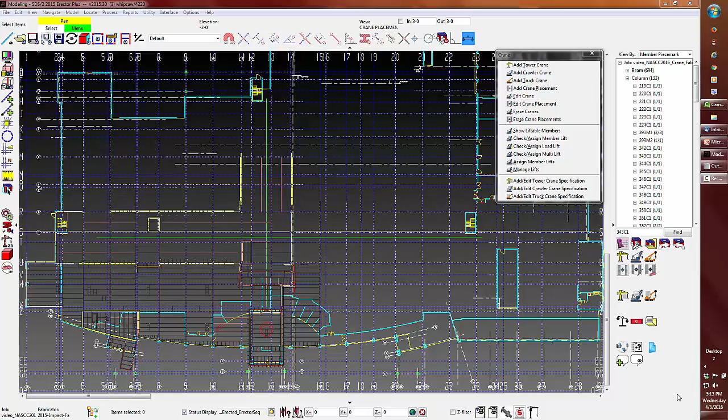I'm determined to keep the crane size down by reducing the reach. So I'll add the crane inside the structure, box out a few members, and then move the crane out to erect the remaining members. One of my goals is to reduce the amount of placements required by finding the best location for as many lifts as possible.

I'm going to add in the widely used Manitowoc 2250 and evaluate its placement at grid 17 in U. I named the crane, and I'll pick the boom, a 140-foot boom. Let's put in a jib 132 at 40 foot, 5 degrees. I'm going to set my main to 4 parts of line and my whip is going to be 1.

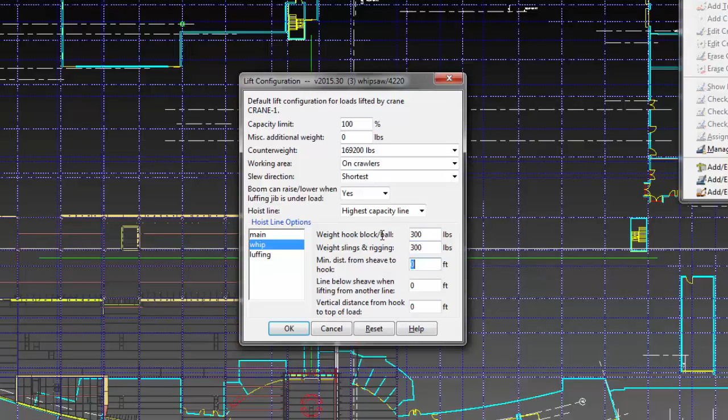Now when I burrow down into my lift configuration, let's set my counterweight at 169,200 pounds. For the main line, we're going to give a 4,000 pound block, 300 pounds for the rigging, 15 for each of the remaining. For the headache ball, we're going to throw in 300, another 300 for the slings, and 15 for those remaining values. I'd like to point out that this can be modified on each lift configuration, right down to each placement, right down to each lift.

I'm giving the first placement for this crane a lift. Here I'm showing you how you can modify that configuration.

The system is checking on the fly the feasibility of the set location of the lifts based off the following calculations: strength and stability of the crane, hoist capacity, so that's the parts of line, the reach radius, which is taken from the members or assemblies' center of mass or gravity, and lift height.

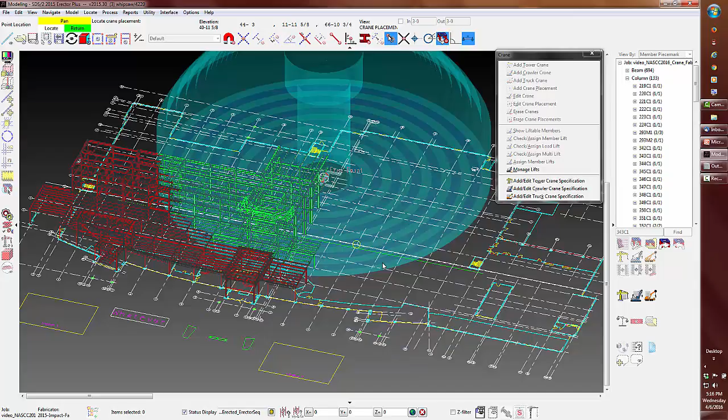When I rotate, you can see these blue rings, which indicate no lift area for both the boom and the jib. Green indicates that the pick and set points pass. Orange is a critical lift as per OSHA subpart R, which is 75% of the rated load chart. Red means either the pick or set calculation has failed.

Note, you can still add the failed lift to the crane's lift list if you disagree with the system. As I undo back to plan view, I'll finish by locating at axis 17U.

Next, I'll orient the direction of the tracks. Now I will set the furthest laydown location or pick point for the crane. Note that this laydown can be modified for each lift. The same criteria used for the set point is also used for the laydown point.

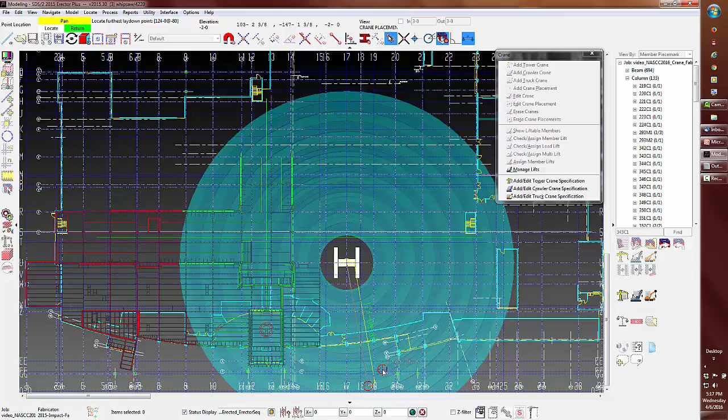To get the results I'm looking for, I'll set the point at 124 foot at 80 degrees outside of the structure. Then I'll finish by setting the boom orientation.

On a side note, the data is correct, but the crane object you see is only a placeholder and does not depict the actual size of the crane dimensions except for the boom and jib length.

By using the Show Liftable Members, I can see the liftable members at the selected placement and their lift conditions using the current crane configuration.

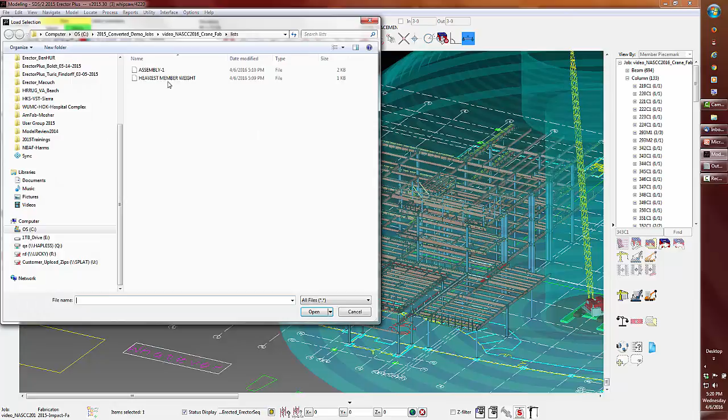I'm going to check the 343 C1 column, which was determined as our heaviest weight using this placement location. Again, I can modify the lift configuration, but I won't. We can see that the lift passes for the pick and set points.

SDS2 uses the deductive method for its lift calculation. Some may use the additive method and some a combination of both. The difference between these methods will cause the difference in where the 75% for the critical lift is at. We also do not use interpolation of the rated load charts, as stipulated from our research.

Finally, our sheave height is measured from the sheave to the underside of tracks. We do not take into consideration the 3% deflection on the boom and jib during the lift. Also concerning height, our check is done at the set and pick points. We do not look for obstructions along the way, nor do we consider the length of the rope between multi-lifts. The height is determined from the top of the lifted steel.

I will assign this lift to the placement.

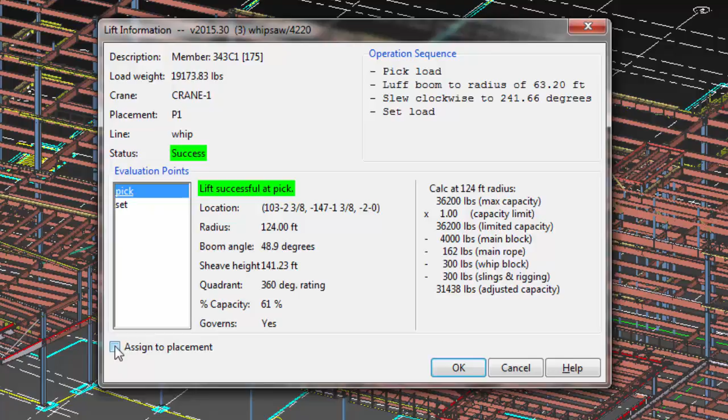I'm going to open up the Manage list for this crane placement. When I select a piece mark in the list, notice that the column is selected in the model. The same works vice versa. I can view the assigned member and of course all of its calculation data.

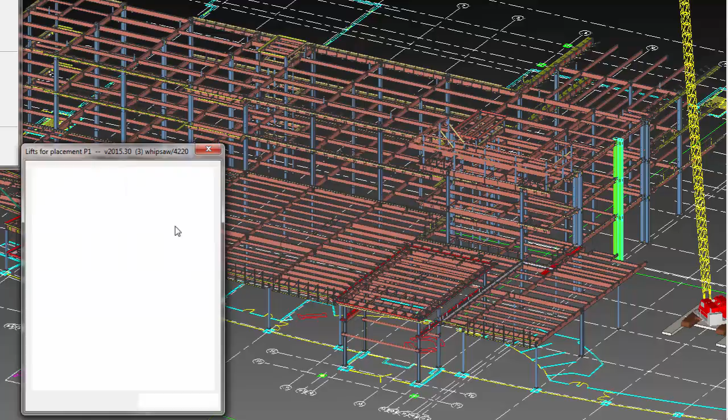I can also edit this member again, and modify the pick location or the lift configuration. I'm going to change this to a main line, from the whip, and we now have a critical lift. Since the pick governs, you can modify the pick location so the lift is not critical.

I want to point out that you can assign failed lifts to a crane placement if you feel the lift can be made. After all, you're the boss. All this data can then be reported, but we'll see that later.

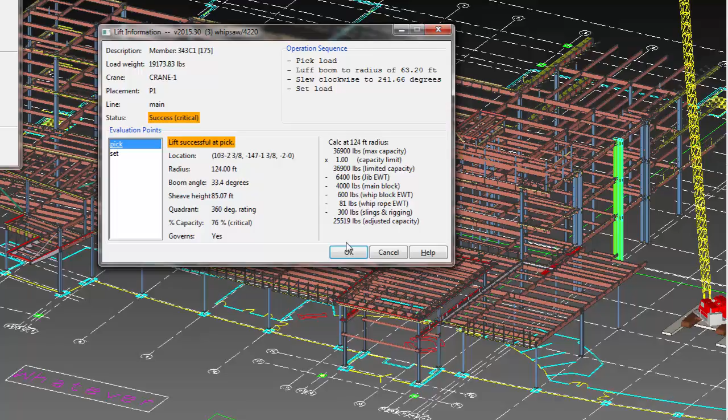It would take forever to select each member and add it to this crane placement, so I will use the Assign Member Lifts to batch assign members to this particular placement. Using this tool, I can disable the ability to select members that are hidden or members that are failed or assigned to another crane placement. Once again, you have that lift configuration to refine this lift.

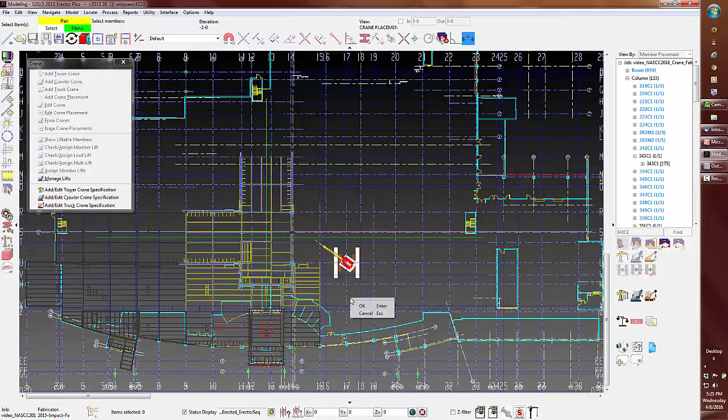I'm going to grab a portion of the building and then assign the members to this crane placement. I can see all the members listed with this placement, and when I select the members in the list, I see the members selected in the model.

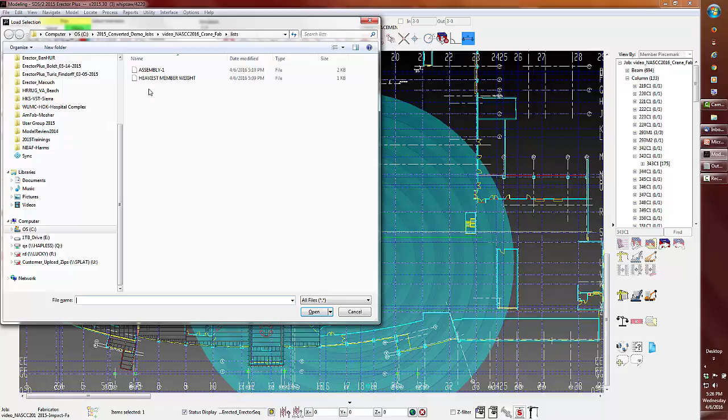Time to go ahead and add that assembled canopy to this particular crane placement lift. There's all the data for the assembly and all the members that are assembled together. When I go to my Manage Lift list, we can now see that assembly.

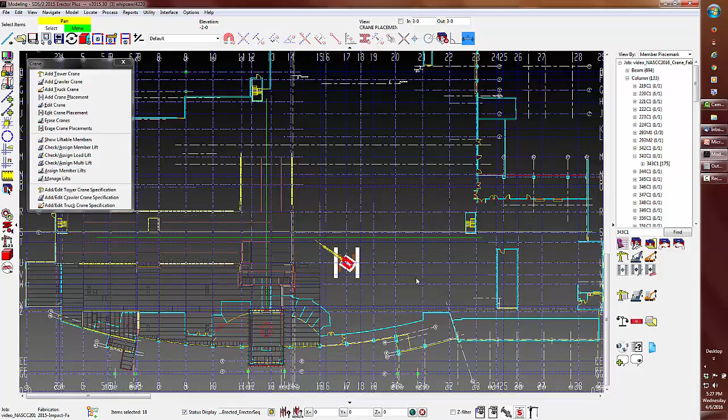What about all the other non-steel lifts, such as decking, panelized joists, concrete panels, and so on? This is where the Assign Load lift comes into play. I can assign items like decking. I'm going to go in here and add a 3,000 pound bundle. I can modify the pick point, but I'll leave what I have and leave the configuration as it is.

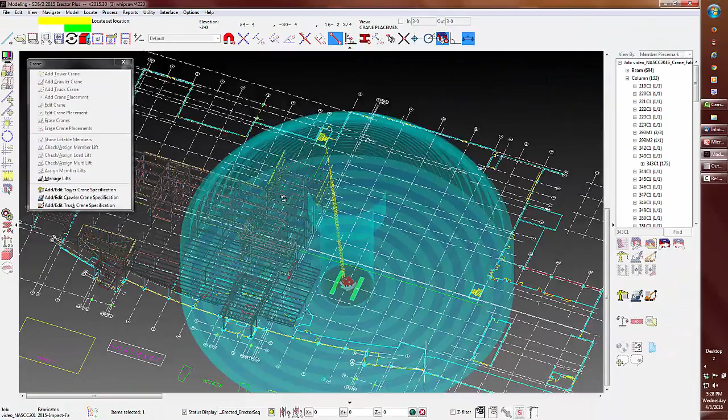Then I will go ahead and set the bundle on the roof. There's the information for the lift. Go ahead and assign it to that crane placement. Look at Manage Lifts, and we now see the decking in that particular lift list.

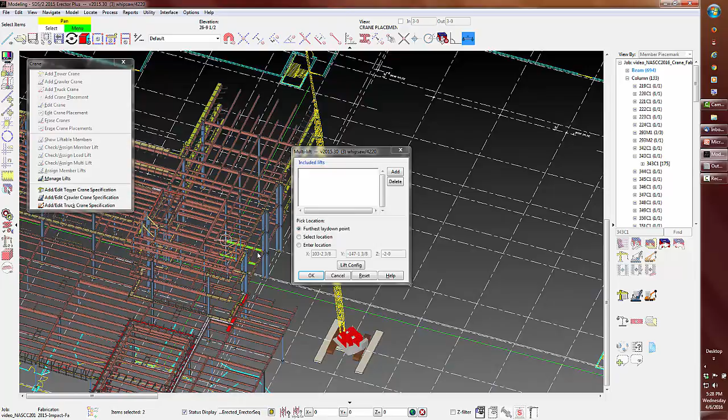We can even do multi-lifts or Christmas treeing. Please note that the height will need to be evaluated with this, as mentioned earlier. Select the members we want, go ahead and assign it. We can see the calculations for the pick and set point, and the members that are in that particular lift.

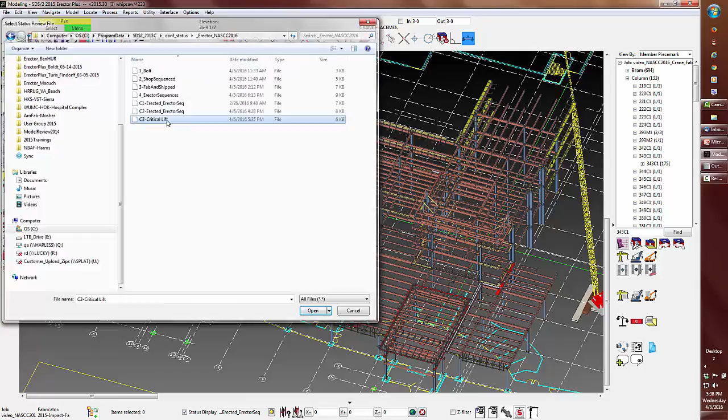I would add in another crane placement for this crane, but I think you get the gist of it. In short, each crane can have as many placements as required, and you can have multiple cranes and multiple crane types with multiple placements. You even have status filters that can show members with critical lifts, which can then be exported in a color-coded 3D PDF as seen in the earlier work package video. The maroon members are assigned to the placement and the orange member is the critical lift.

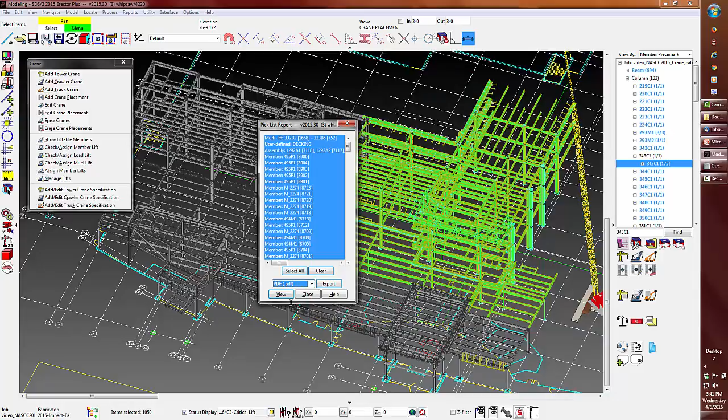Now to run a quick placement pick list report for this crane. This is just a pick list for this placement. It is not an ordered pick list. At least it's not an ordered pick list at the moment.

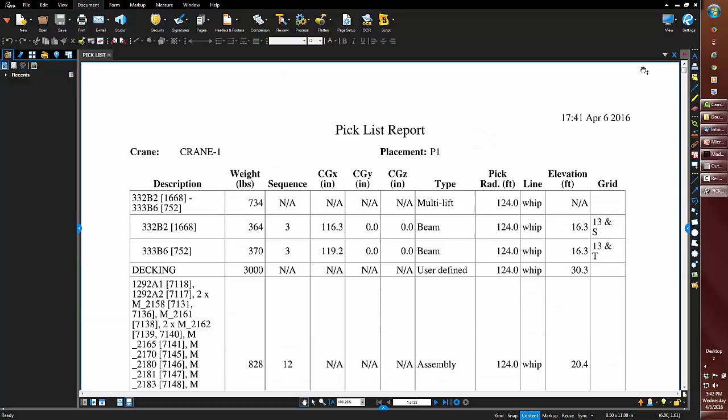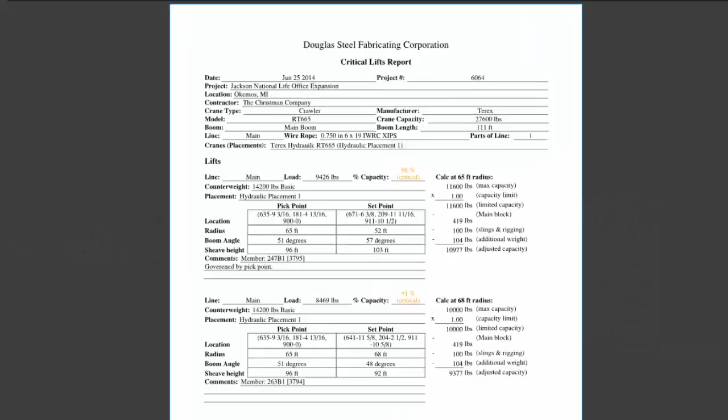Here are some examples of exported data from Douglas Steel Fabricating Corporation: critical lift list report, defining lift list, and of course crane placement drawings.

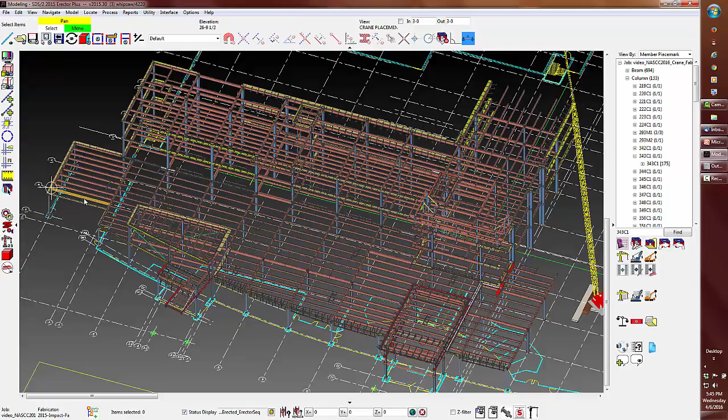To finish up this video, I'm going to load a status filter that will show members that have been set to an erected status. When I edit a member, we can see that there are many settings that can be set by the erector. Note, these settings can be sent back to update the fabricator's model through an XML file, but I will only mention this ability due to time.

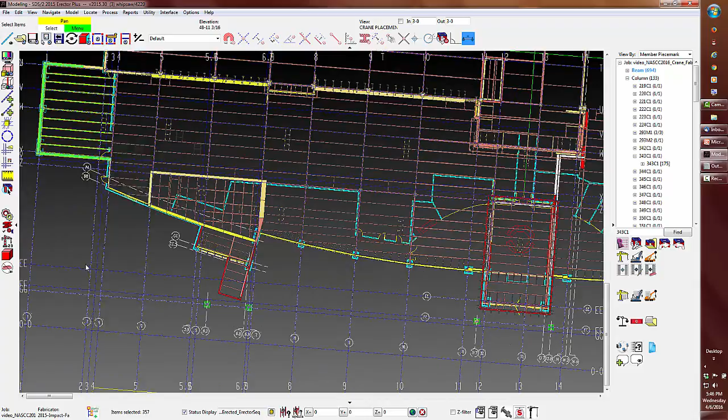Time to set some members with the status of erected. Using my update status, I will set my date. Notice how the status automatically color codes the model.

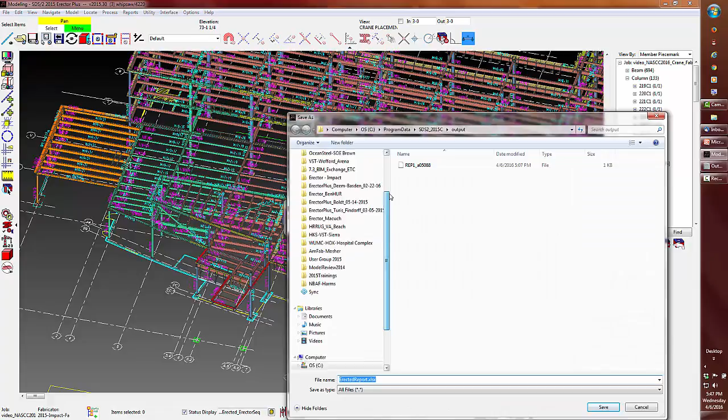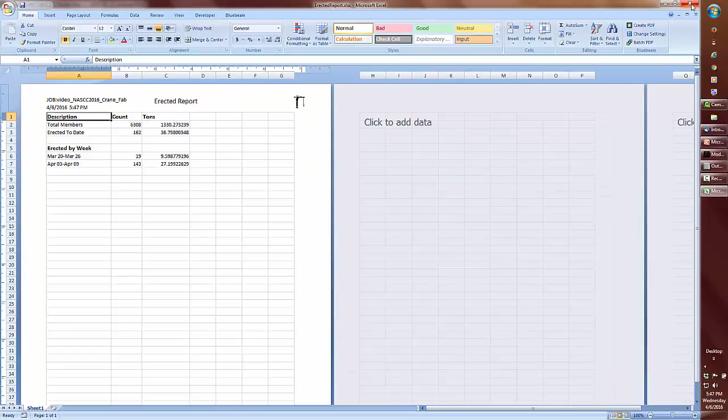I'll finish by running what is called the erected report. This will go ahead and give a weekly erection report for the entire project, which indicates the tonnage and the number of members erected. On a final note, you can pack up the project and an end user can install the free viewer to run reports, look at the status of the models, and review the information at no cost to them. This will conclude this video.